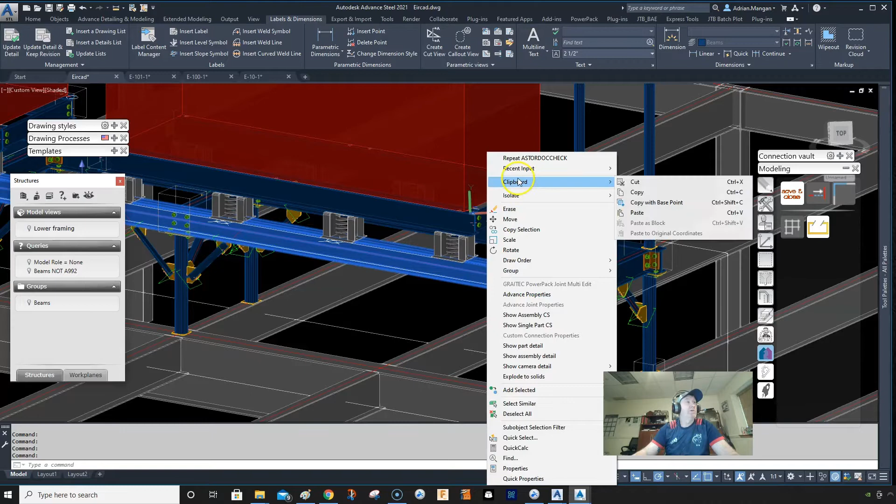So updating the drawing while you're in the drawing, and how to be careful with your lists. We're going to go through this project again. So what I'm going to do is click on this beam and do show assembly detail.

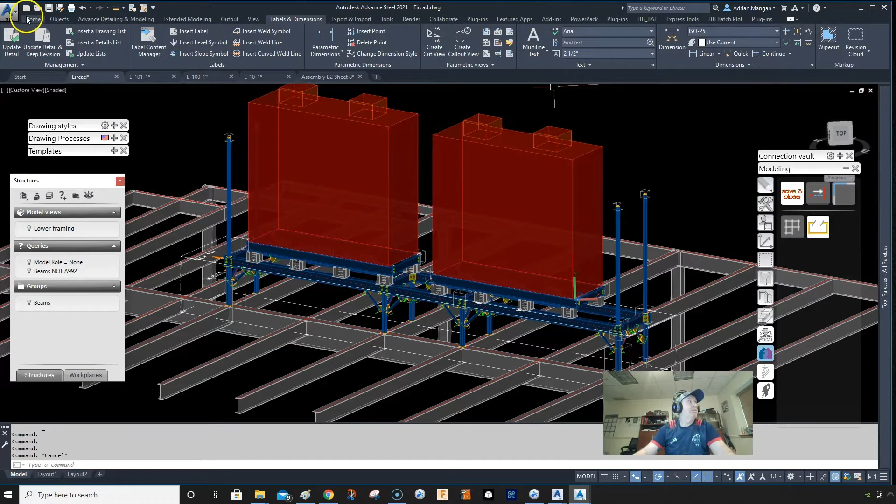So this is my assembly detail, B2, there's two pieces. If we go back here, we can turn off these RTU units. Let's turn off the layers for the RTUs. Alright, so these are the two beams, this one and this one.

What I'm going to do is turn off the existing steel as well, just to make it so we can see a little bit better. So the existing steel is off. If I want, I can use my model view box to restrict it, but I won't. I'll leave this all on.

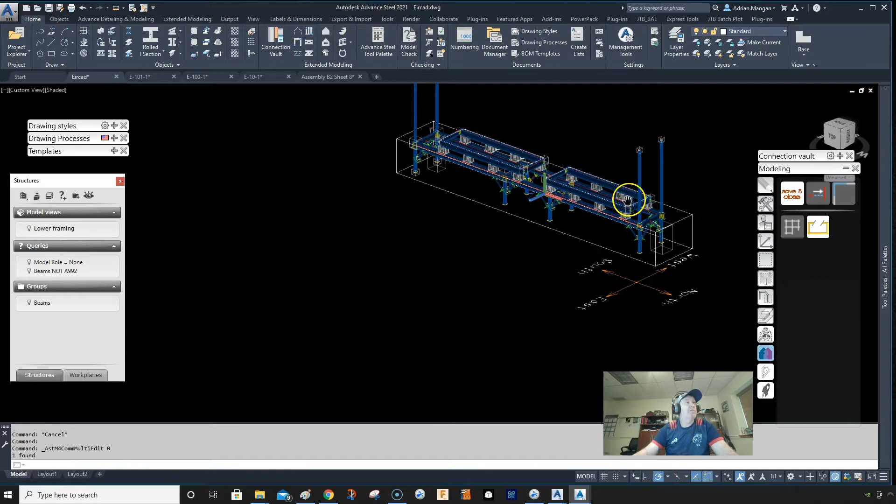So what I want to do is just change this beam slightly. I'm going to change both of them so they'll both be the same. I'm just going to add some stiffeners into this beam, and I'll put them at the center here.

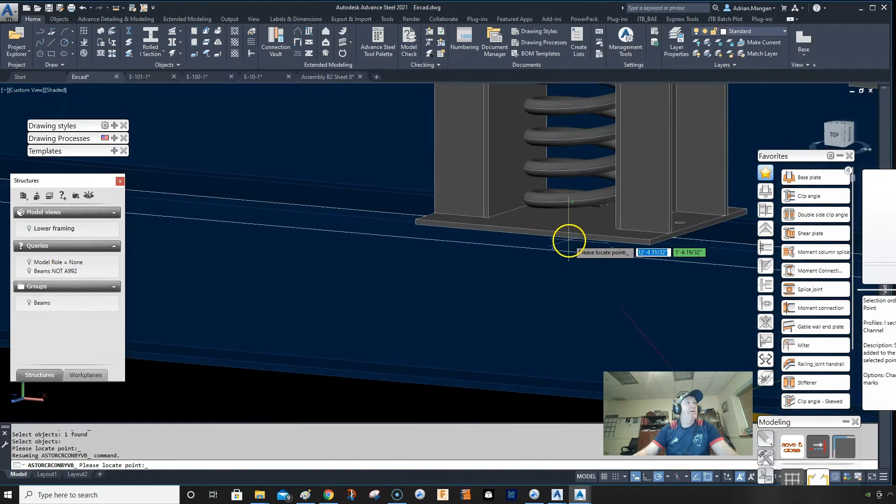Yeah, this is the problem with the special parts, it's not looking to click on that. So what I'll do is pick that point there, so that should be the center point of that.

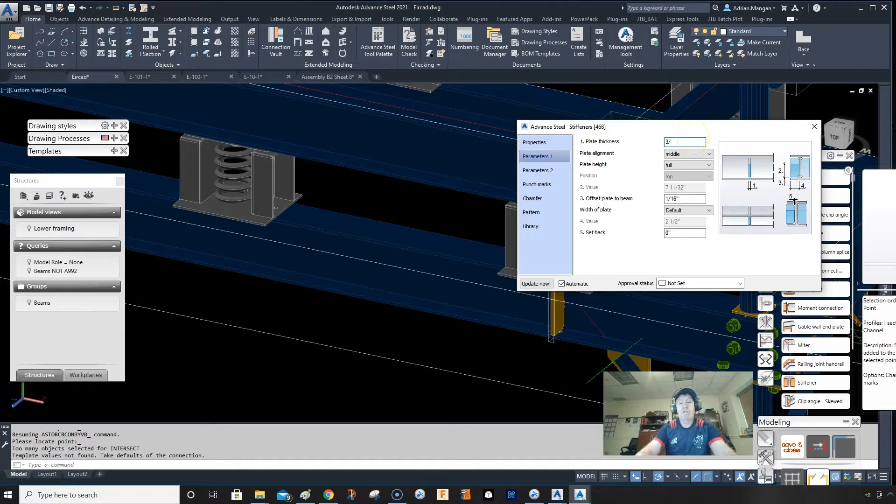So let's check the parameters. 1/16 plate, so there's the space, so that's good. So we'll just make these 3/8 so they're not way too big.

Now we'll click on the box, and we're going to copy that connection over to this other side and wait for it to get to the same point. Now I will just double check and see.

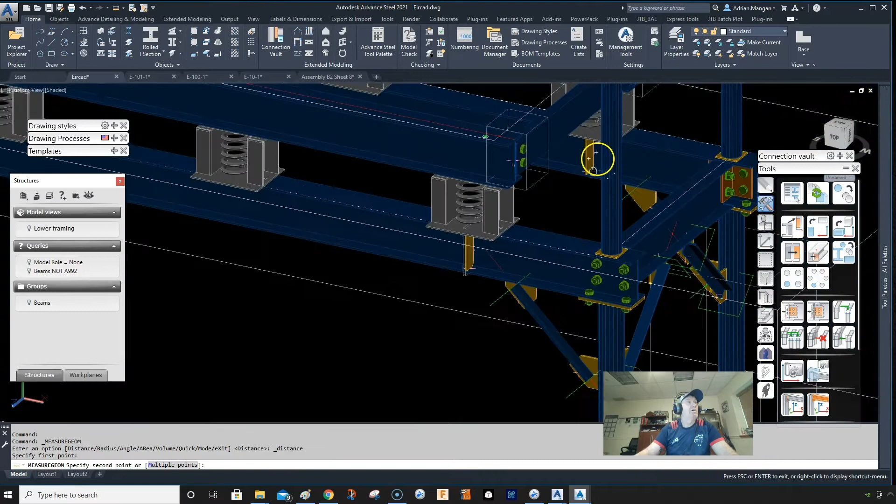You can see that that's 0, 0, and it's 3/8 and 5/8 across. So these parts should both be the same.

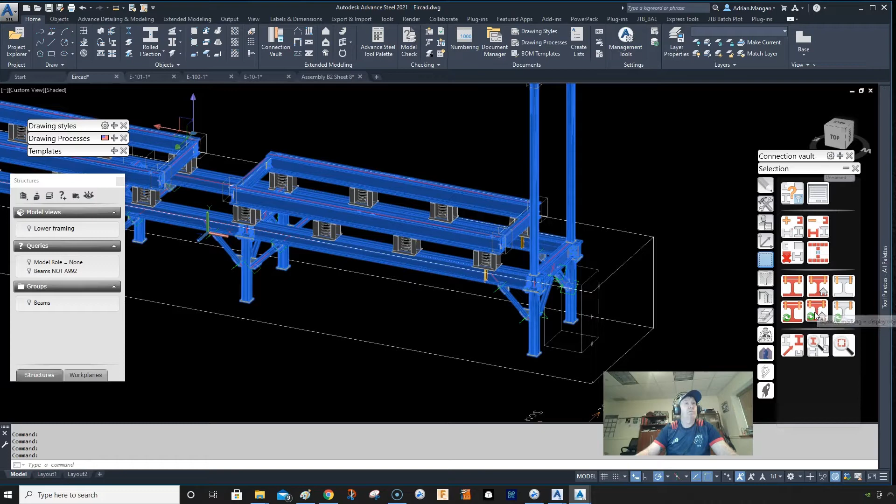So what I have here is a group with all my elements selected. You can see it hasn't selected those stiffeners. So what I'm going to do is come over here and select this one, which is remove displayed objects and then show parts connected in the shop.

So that's what we got, now it's selected those, it's highlighted them, I should say. Click this to select it, and then we'll number this.

So number it, okay, you can see the two of them were the same. Now if I had put the stiffeners in the wrong place, it would have renamed one of these B2s to like a B4, most likely.

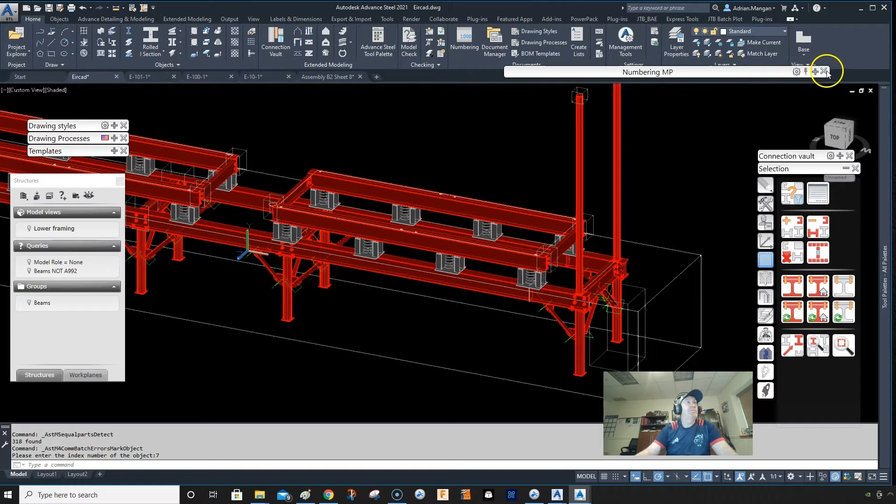So what I'm going to do now, sometimes when you're doing this on the fly, the shop will call me, they want to make a change, I'll have to open the part. So what I'll do then is I'll be in the part already, and keep in mind this is also clipped, so it's probably going to move quite a bit.

So what you want to do is you can see up here that this is just the beam and the plates, so these plates on the bottom.

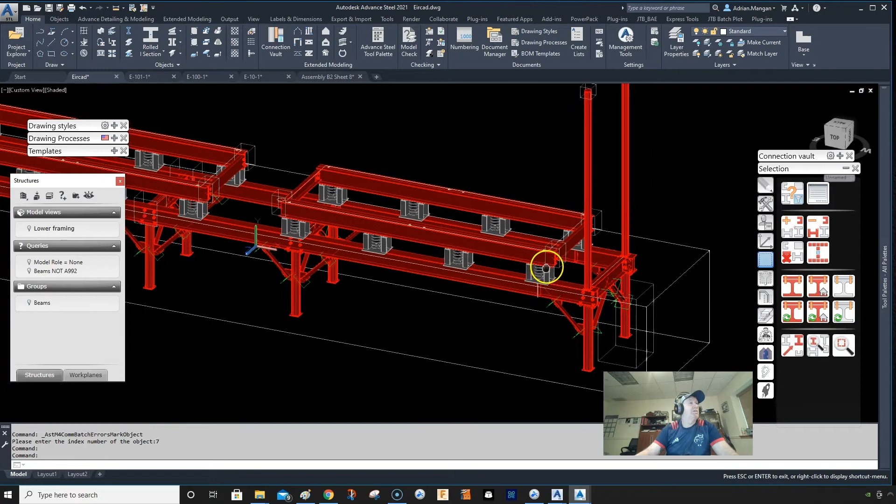So what I'm going to do is just click on this and we can see what number this is. Name on this, and this is P1007. So let's unhighlight those.

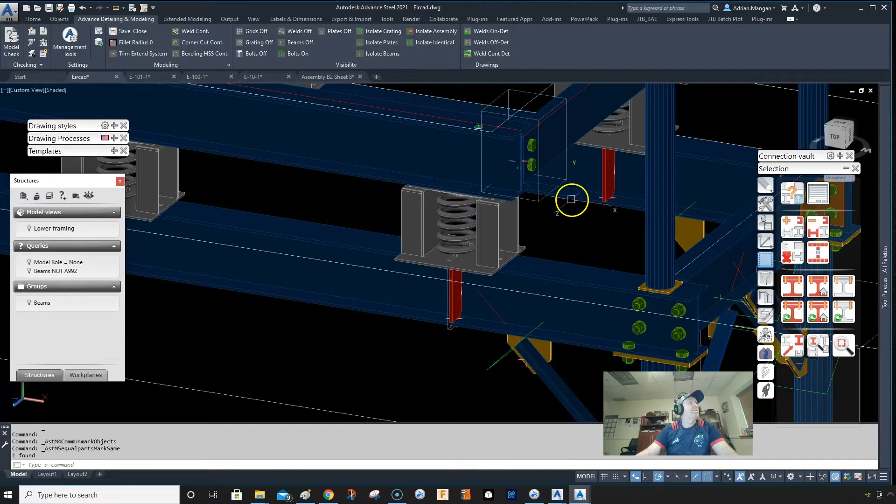Let's go up here, and if I click this... sorry, I'm trying to get the plates off. Isolate identical, sorry, that's what I was looking for, I don't use it too often. So there, isolate identical, so it shows what's identical, number, size, all that. So let's close that, so that's good.

So let's go back to the beam, click on the beam, and now if we update this, let's go to label and dimensions, update detail. You can see up here that this will not change, so my list has not changed.

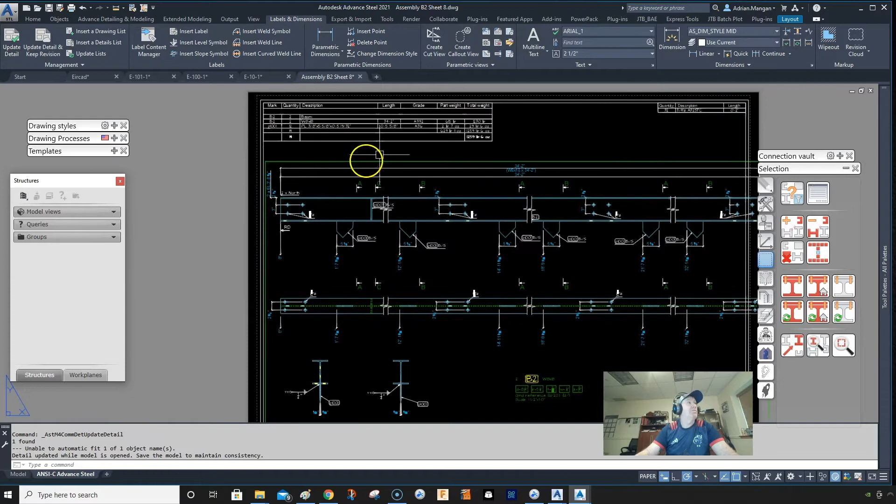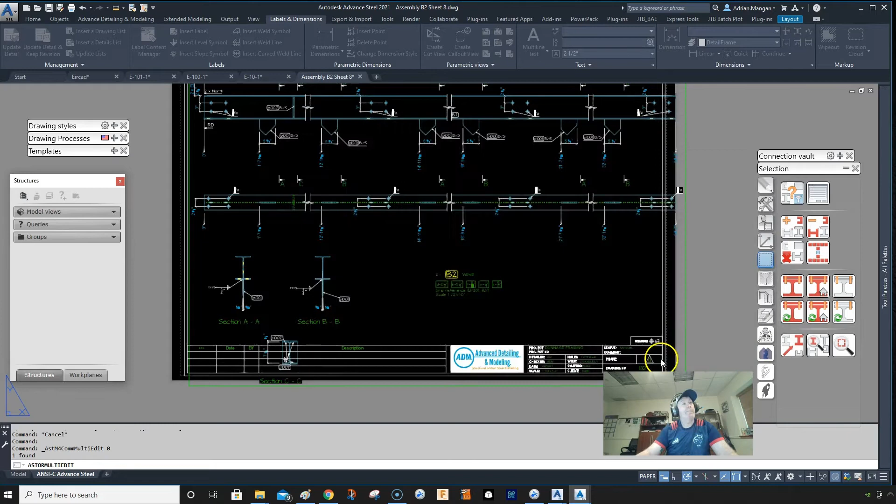So you can see here, my stiffener is now in here, both sides. My clipping is a little off, so I'll double click on this and go to my clipping, it's a 1/2 inch, so I'll go to 3/8, and hopefully that'll bring it back inside the page. It's pretty close, I won't get too crazy with it.

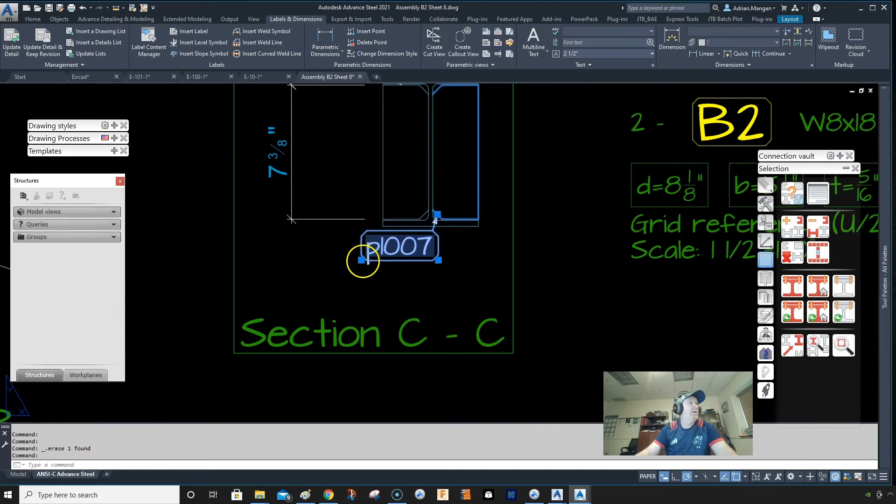I don't want the video to be too long. So you can see it's also added my new section which I need. You can see there's a space top and bottom, which is what most of my clients want.

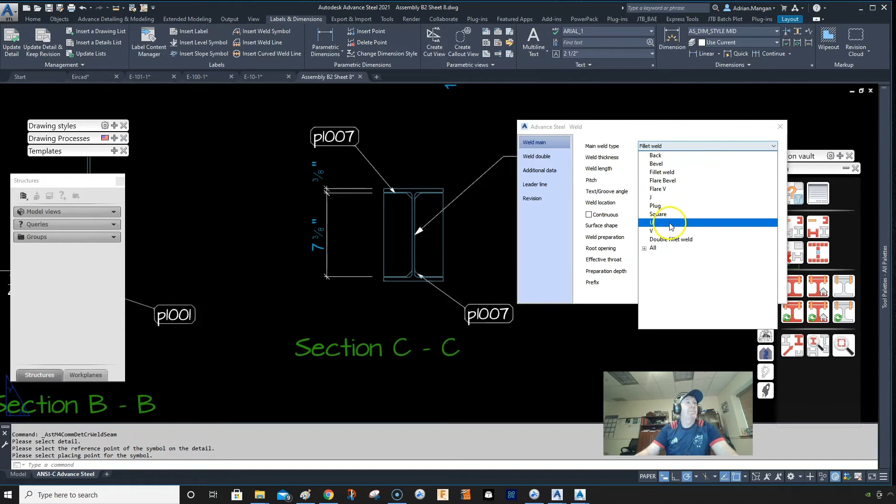This dimension is okay, so I'll insert a weld symbol here, and I have it set to come in at 0 at the start, so I'll do a double fillet weld, and typical, sorry.

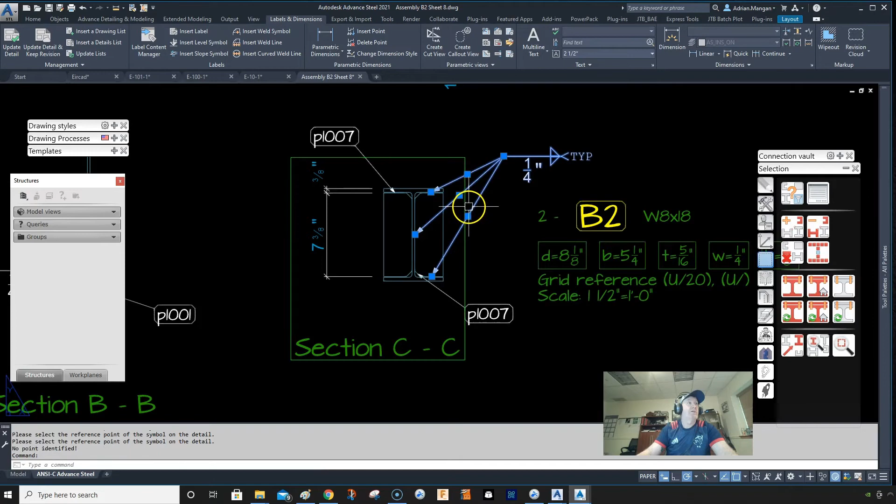And now the new thing which I really like is that I can add a leader. So we can add leaders to this, which is great. I'll move this one down here and this one down here. Alright, it's not great, but it'll do.

So now the point is, a lot of people will update these and they'll forget to update this list, so you need to go back and update, labels and dimensions, go in here, update lists.

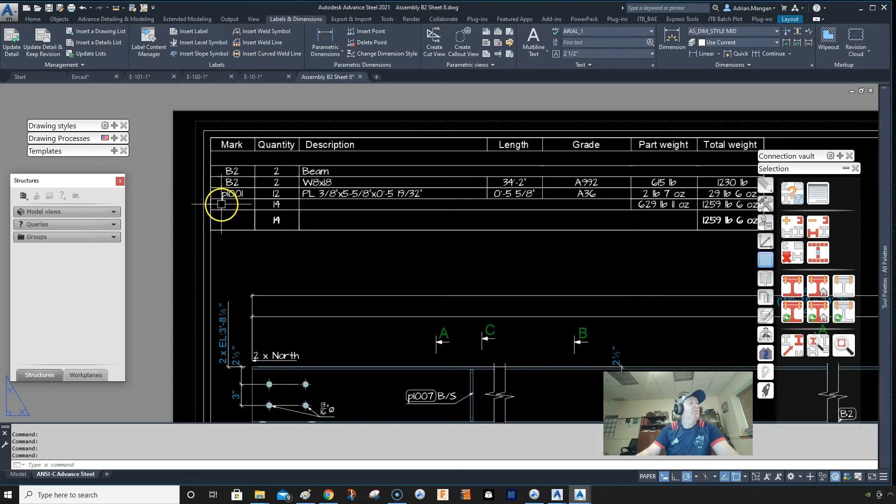So click on update lists, and we should get another one here, P1007, with 2 parts, and your material list will get slightly heavier. So update list. There's your 4, because there's 2 beams, sorry.

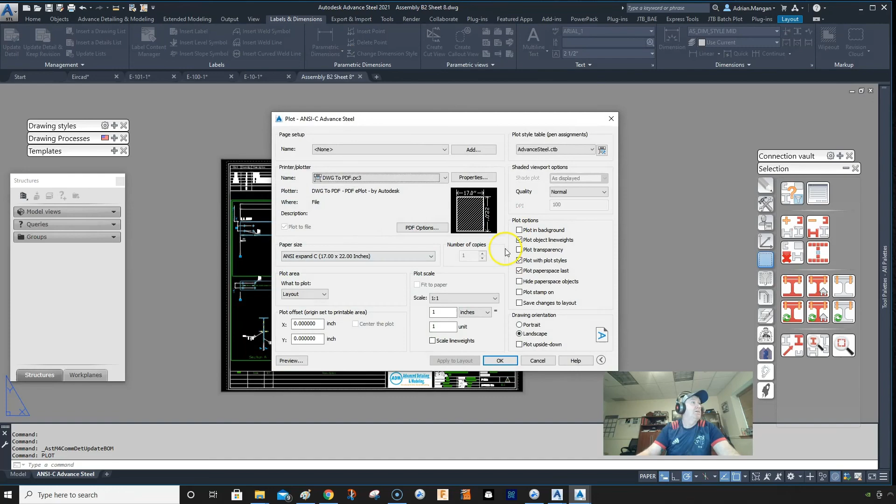As you can see, just be careful. Now what I would do is plot that out, so I can plot that, and then I'll send that straight to him in the shop if he's looking to get something fabricated, you know. So it's kind of a quick thing.

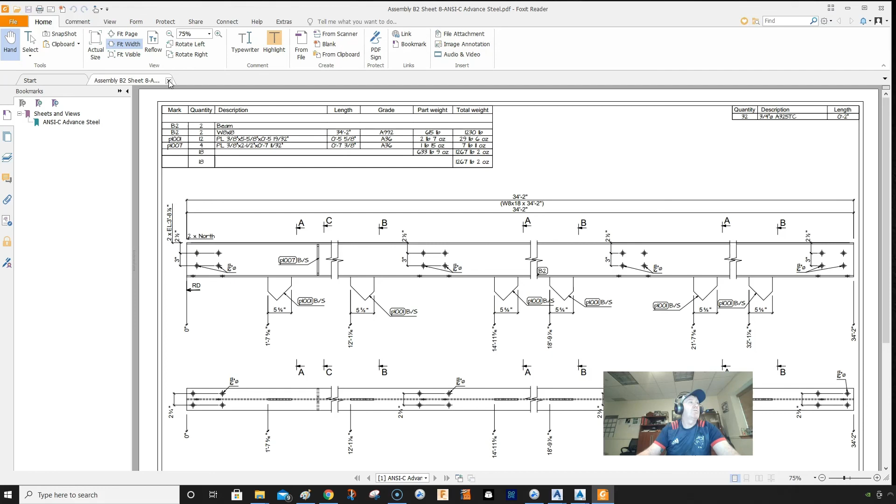Otherwise you're going to update these probably through your document manager, which I don't always like to do, because I like to see what's been updated sometimes. But obviously if you have larger projects, that doesn't work.